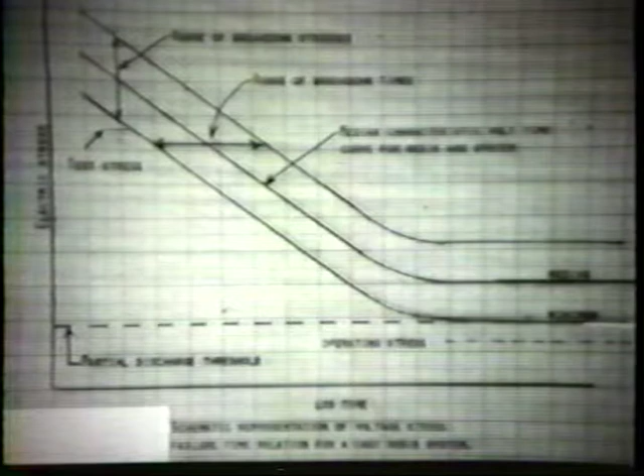This decline is due to partial discharges which can result in delayed failures. This curve shows a band of values representative of the distribution, the variability of the times to failure for a given specimen or type of specimen or a given resin material.

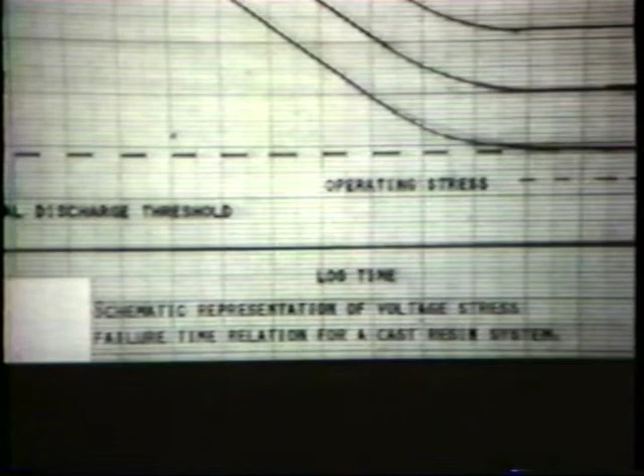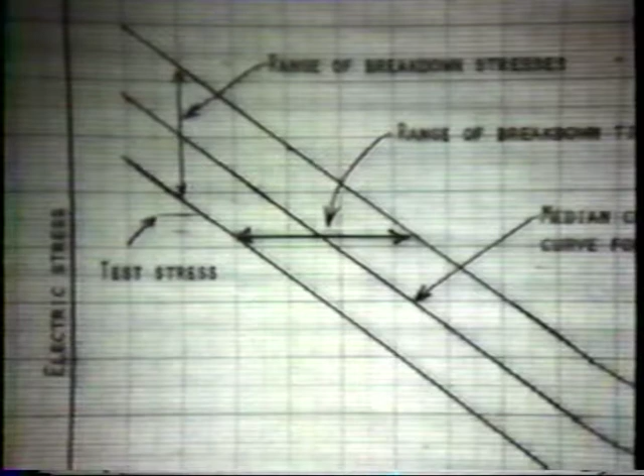This variability occurs in terms of a variation in voltage of breakdown at a given time, or a variation in time to failure at a given voltage stress. You will notice on the curve that the level tends to approach a threshold.

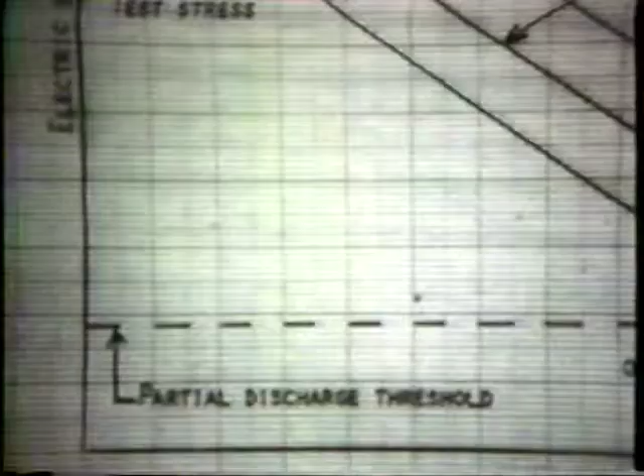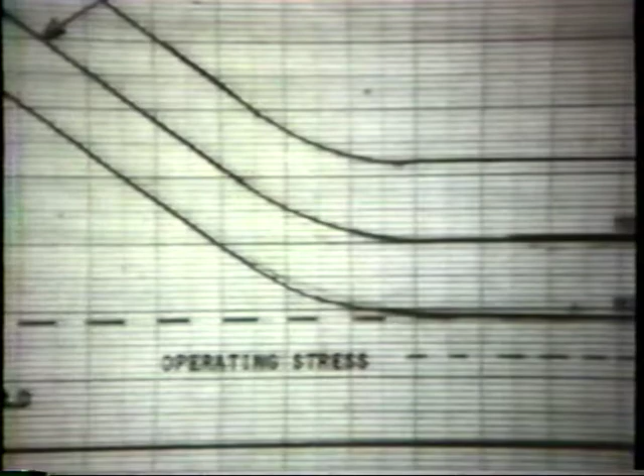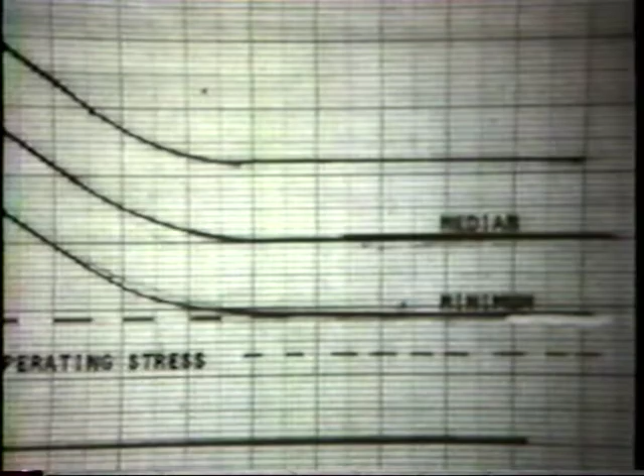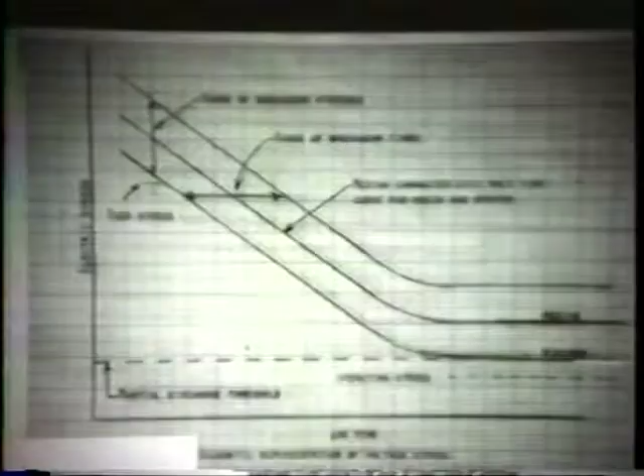This threshold is the threshold for the onset of partial discharges. The dashed horizontal line is drawn to intercept the minimum level at which this may occur, because we believe that in cast systems in particular there is a distribution of sizes of cavities and stress concentrations locally in the resin system. The operating voltage should be set for a long time life below this minimum threshold.

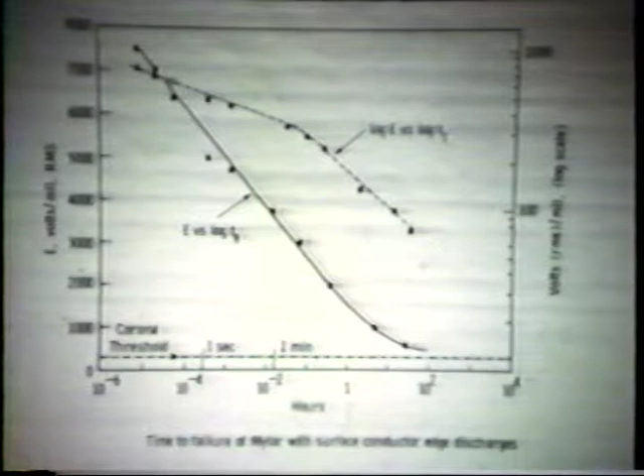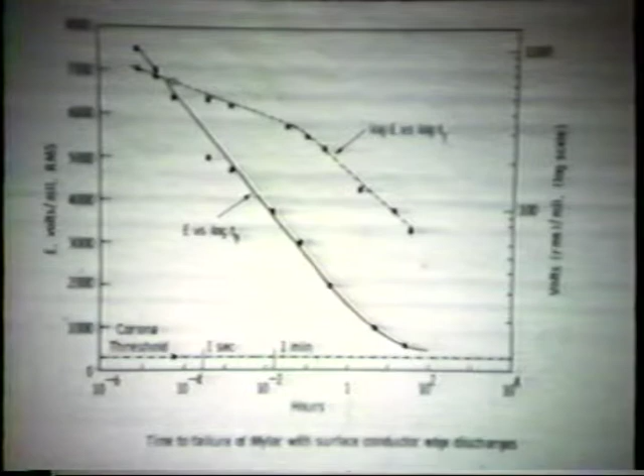If we plot actual data, as we have here, as a function of the voltage stress in volts per mil versus the logarithm of the failure time, we get data like this, which was obtained on a polyethylene terephthalate plastic film. You will notice here that there are two curves.

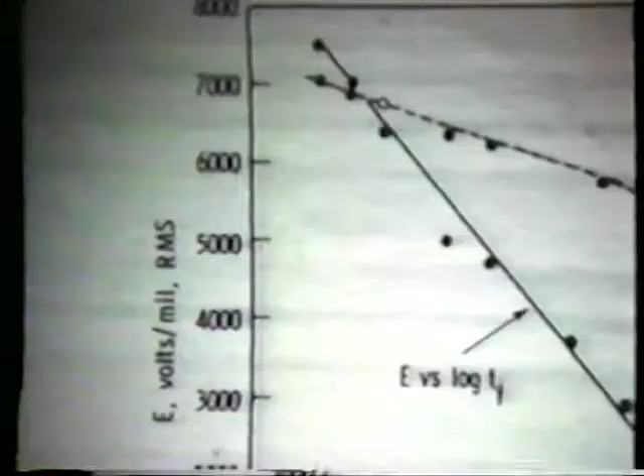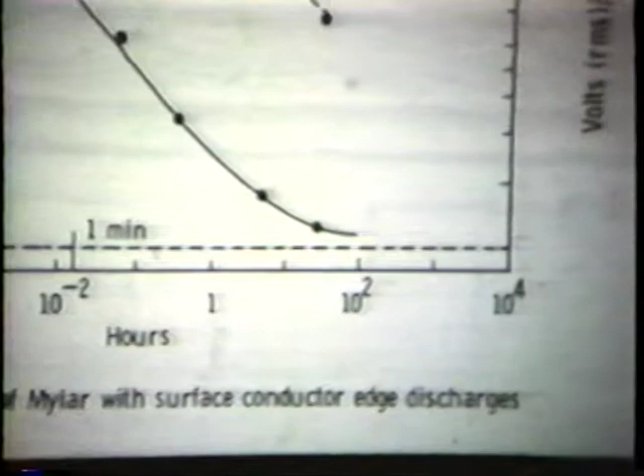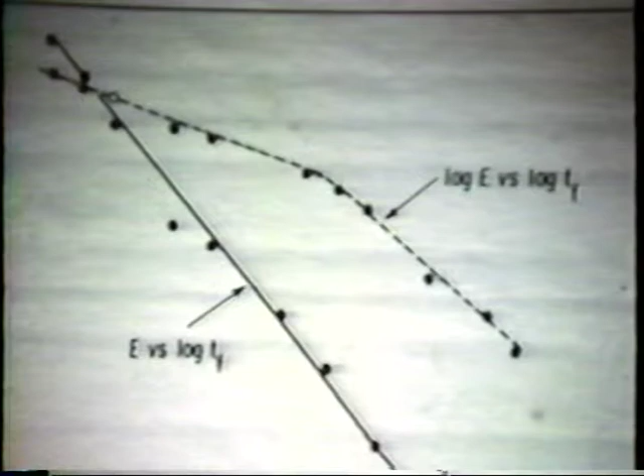One of the curves is plotted as was the schematic curve you just saw, as a function of the stress linearly and the time as a logarithmic function. Another method of plotting such data is shown in the second, upper curve. This curve is plotted as a function of the logarithm of the voltage versus the logarithm of the time. The logarithmic stress or voltage scale is given on the right side of the graph.

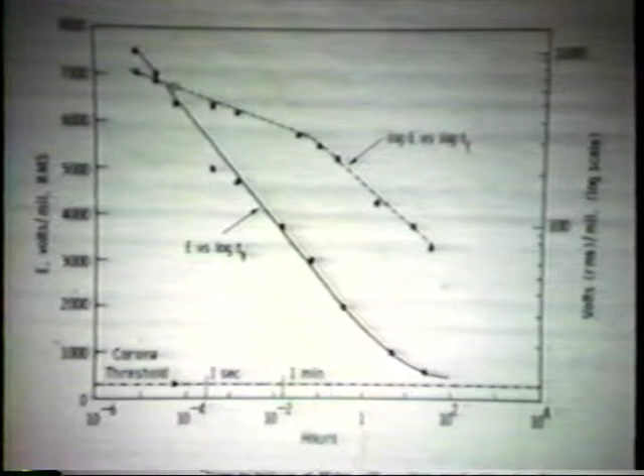This method of plotting has been used more commonly by many investigators, but it has a doubtful theoretical or basic foundation. It does fit, as you see here, the data points over limited ranges of the time and voltage stress.

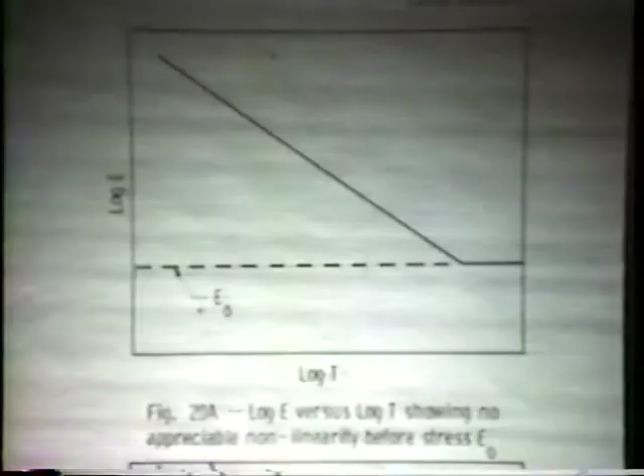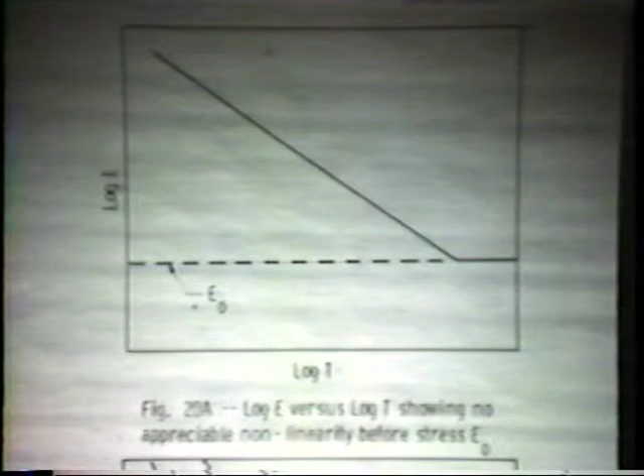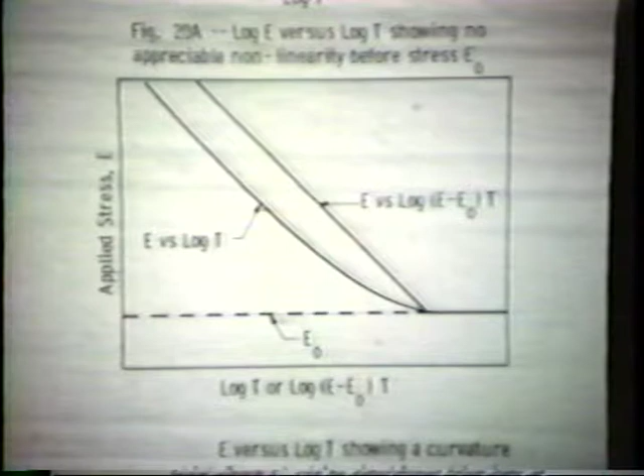We feel that this log-log type of plot, as shown schematically in the upper of the two curves on this slide, is not as good a way of plotting the data as the curve below, where we have plotted first the breakdown time on a log scale as a function of the stress, and then another factor, which is the product of the breakdown time and the difference between the threshold stress E0 and the actual applied stress.

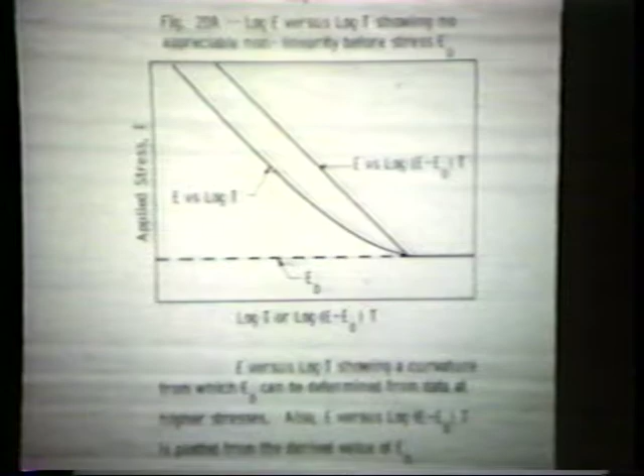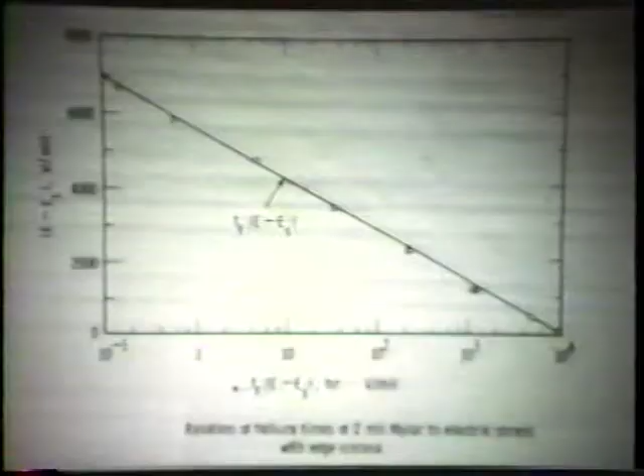When we plot the data in this manner, we find that it is converted to a straight line, as shown in the upper of the two curves on the lower graph. The basis for this method of plotting is illustrated here again on the actual data which was shown in the second slide.

This is based on the fact that the quantity of discharges per unit time is the determining factor in the rate at which it approaches failure. We feel that failure occurs when a sufficient number of discharges have been striking the surface of the resin.

The quantity of discharges is indicated here by the product of a constant which we can say is due to the discharge density, in other words, the number of discharges per unit area, and the frequency. The number of discharges is nearly constant at each cycle, so that if we multiply the number of cycles per unit time, we get the number of discharges per unit time.

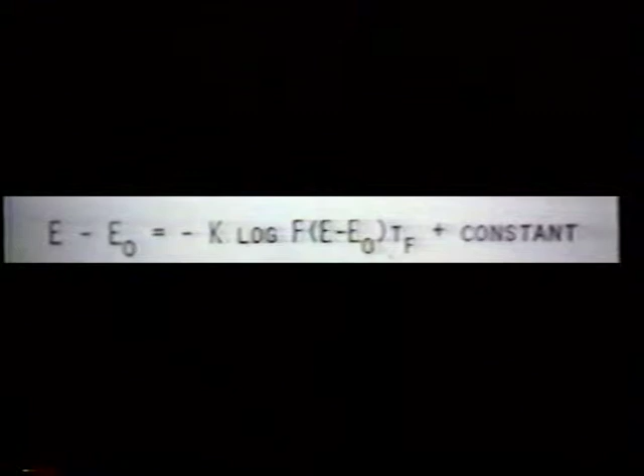And then we have added this other parameter, the applied stress minus E0, which is the threshold stress for discharges.

The derived relation then, using this quantity, is that the breakdown stress minus the threshold stress is equal to a constant times the log of this product of F, the frequency, times the E minus E0 quantity, which is the over voltage above the threshold voltage, and the time, plus another constant, which sets the level of the line.

This line extrapolates to zero at a stress equal to E0. We feel that below this stress, no failures should occur due to the partial discharges.

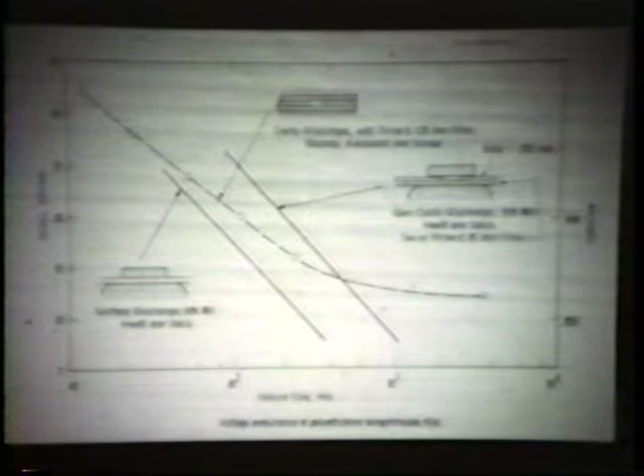Here we are representing some recent data showing the effect of partial discharges measured with cavities placed between two films.

The dashed line is data that was recently published last year from a group of laboratories in Japan. This data was obtained using 3 plastic films with a hole between the center film in which the discharges occurred.

This tends to overlap older data which we had published from the Westinghouse laboratory some years ago, using, instead of the 3 films, a mica sheet which was resistant to the discharges to protect the surface from the edge discharges at the upper electrode.

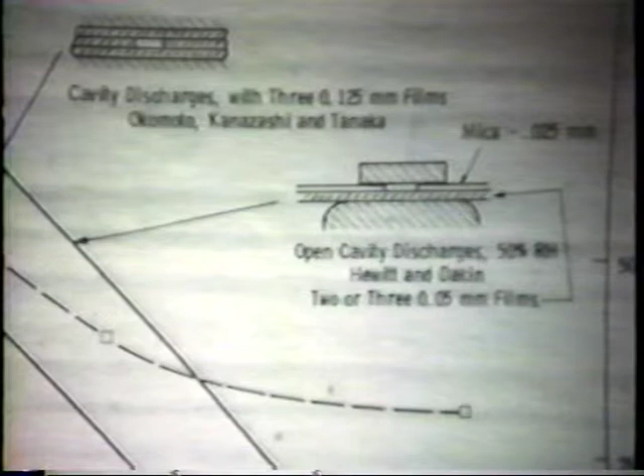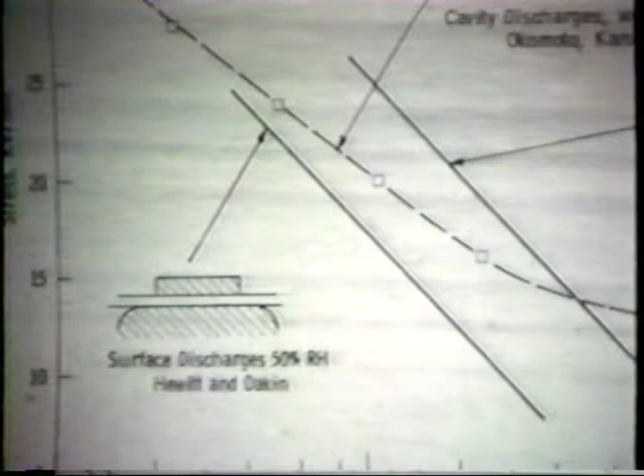You can see that the 2 straight solid lines show that the times to failure are longer when we have internal discharges than with surface discharges, somewhat longer.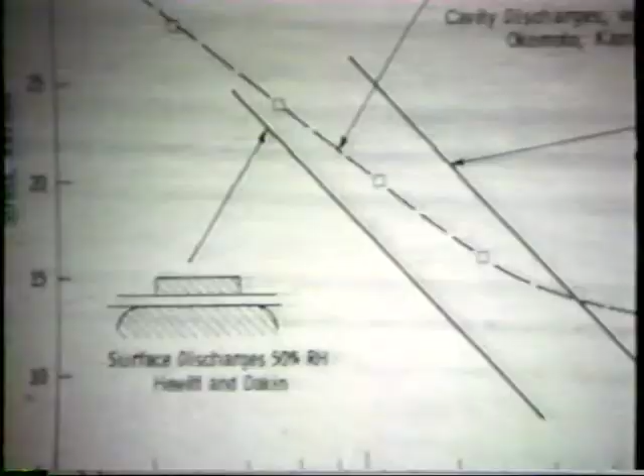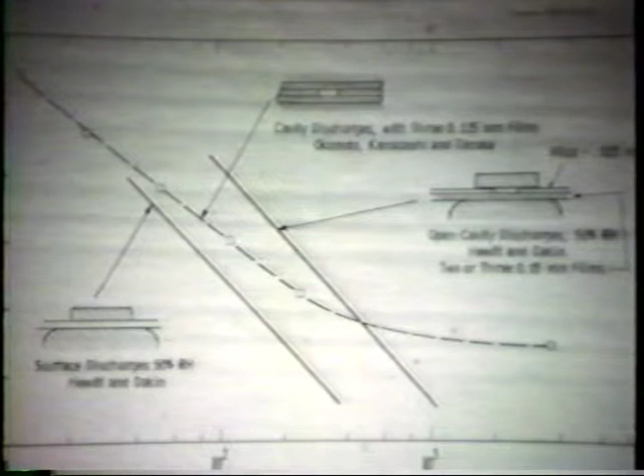There are a number of factors which influence this difference between internal discharges and surface discharges. The internal discharges will start at a higher voltage because the breakdown spacing of a cavity, such as represented here by the sketch in this slide, is smaller than the breakdown spacing that would be prevalent at the edge of the electrode on the surface.

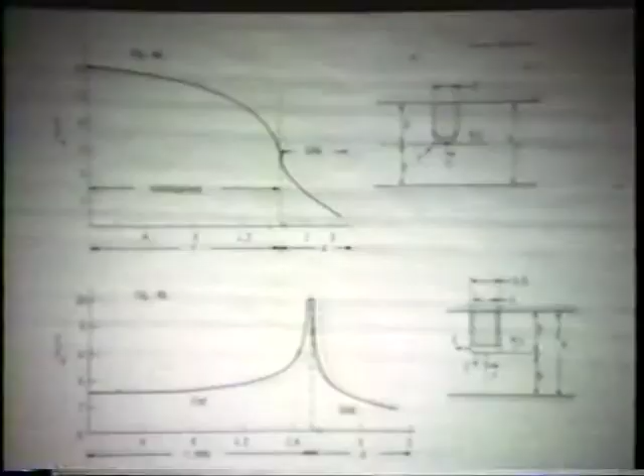Another factor which influences the breakdown time in cavities is the stress concentration. We show here the data obtained on the stress distribution with 2 different shapes of cavities.

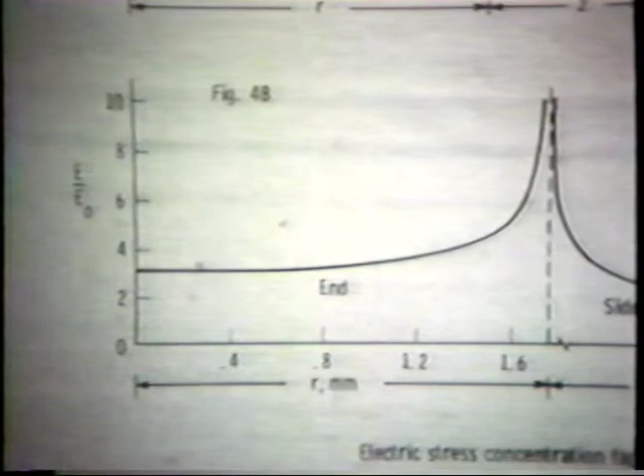The lower curve in this slide shows the electric stress distribution as a function of the distance from the center of the electrode to the edge of the cavity. This stress rises to a high value of the order of 10-fold above the average stress in this type of arrangement.

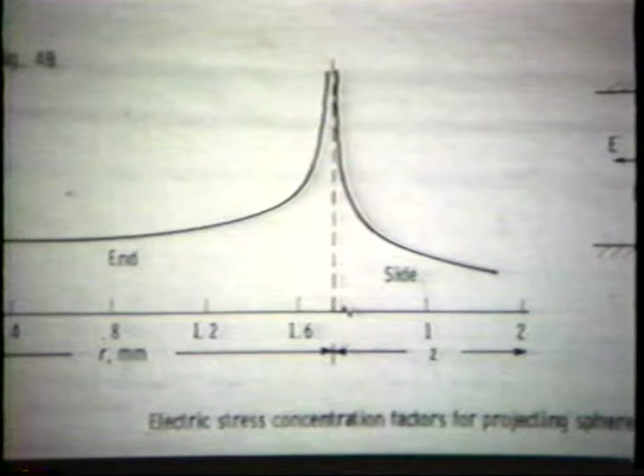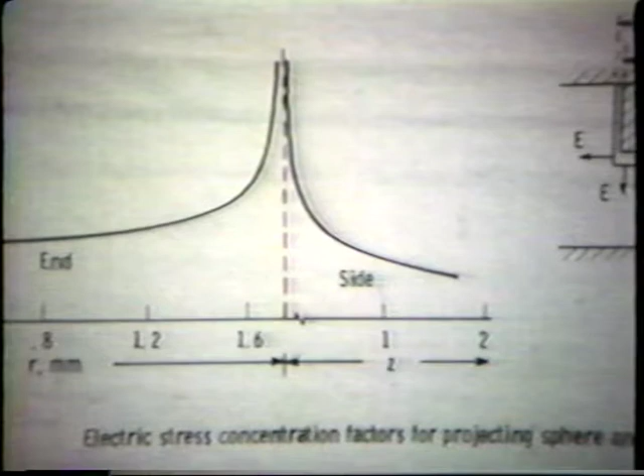In this case, tests were made to failure. The discharges occurred in the space between the metal pin inserted into the cavity and the bottom of the cavity. Because of the stress concentration at the corner edge of the cavity, which is the bottom of a cylindrical space, is very high, and this influences the breakdown to occur at that point.

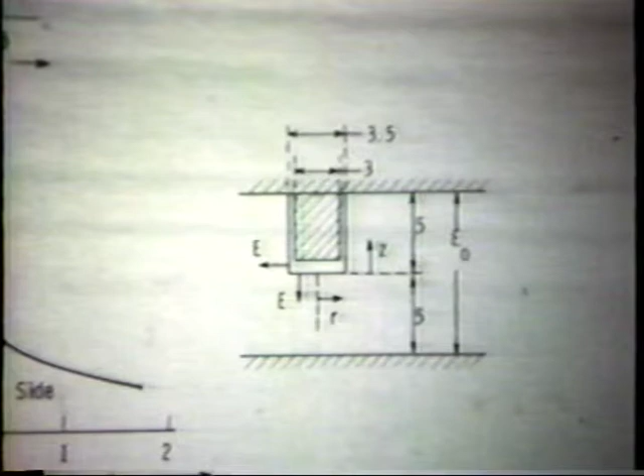A treeing-like breakdown pattern developed, and failure occurred from the edge of this cavity. This has led us to believe that the shape of the cavity is extremely important in the resistance to failure from discharges in such cavities.

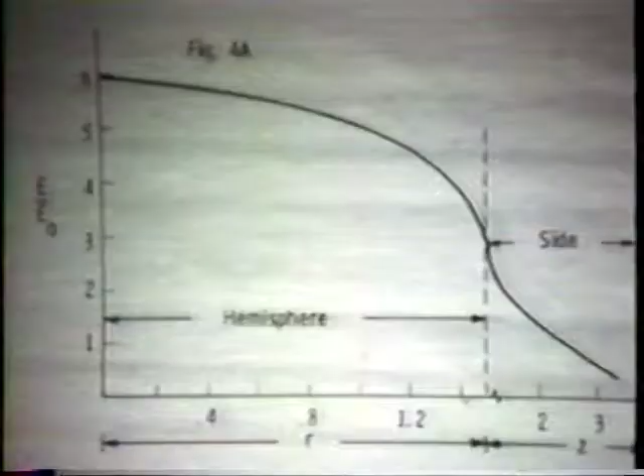The upper figure in this slide shows the stress distribution of a cavity formed by a hemispherically ended cylindrical hole into which a pin was also placed to form the upper electrode.

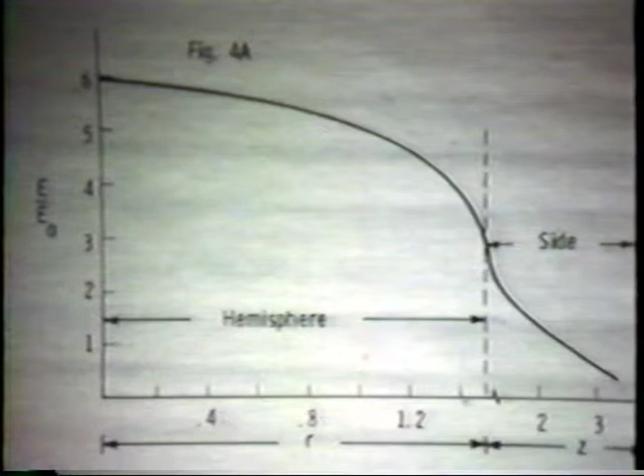You can see that the maximum stress, which here occurs at this center bottom of the cavity, is less than it is in the lower case. It's 6 versus 10 in the lower case.

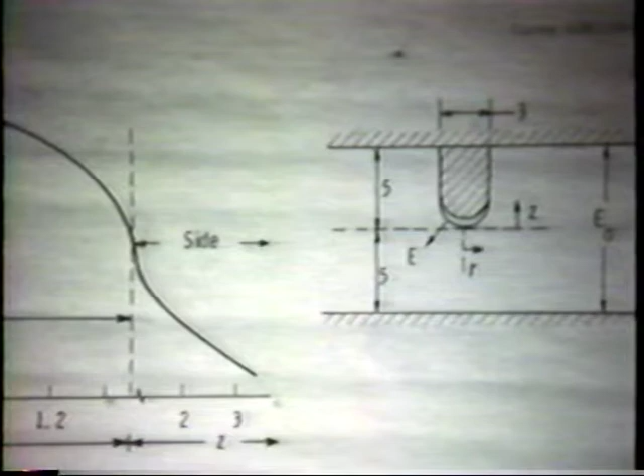This produced a longer failure time than in the lower case, as shown in the next slide. You will notice a stress of the order of 8 kilovolts per millimeter.

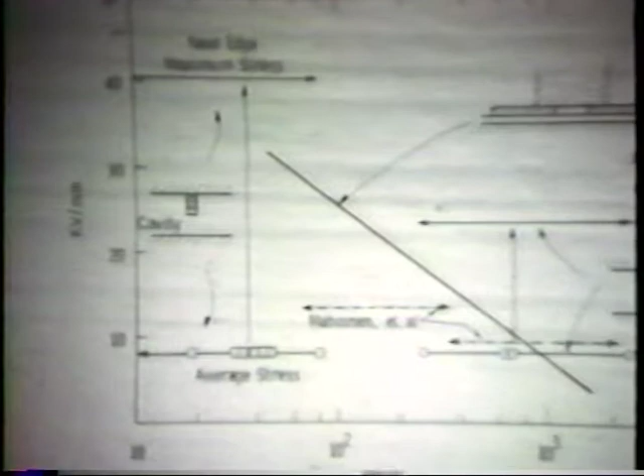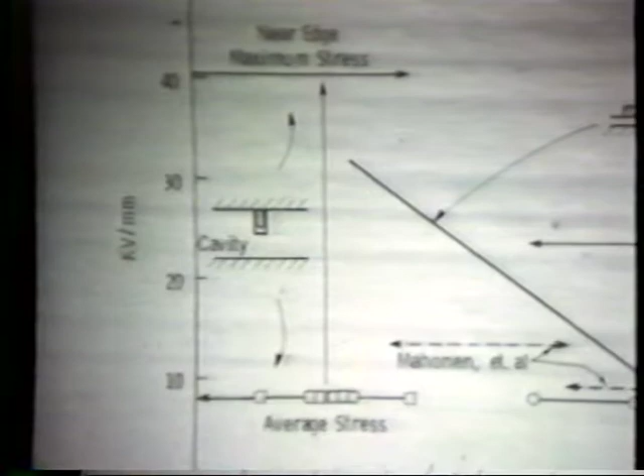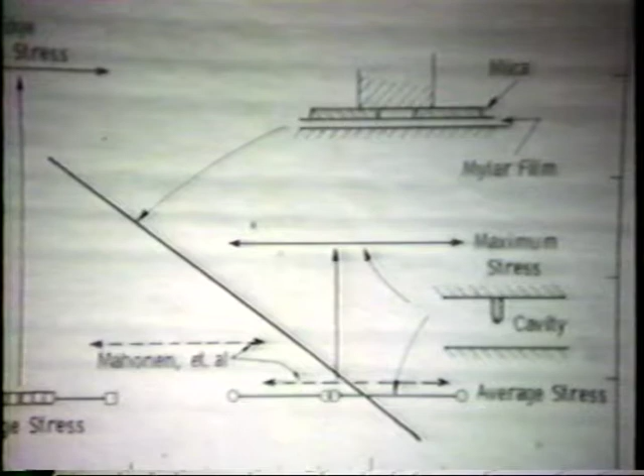At the left, we have the breakdown data obtained for a cylindrical cavity with a square edge bottom, as shown in the previous slide. To the right, we show a band of data at the 8 kV per millimeter stress, which represents the failure times at the bottom of the cylindrical cavity having the hemispherical end, which had the lower stress.

You will notice in particular that the failure time with the sharp-edged cavity is much shorter even than with the cavity formed by a hole through a sheet of mica, which is represented by the straight slanting line. This is the same data that was presented in a previous slide.

This very short failure time was one of the reasons why we suspected that the stress in the resin at the bottom of the cavity was a very important factor in the failure under these conditions.

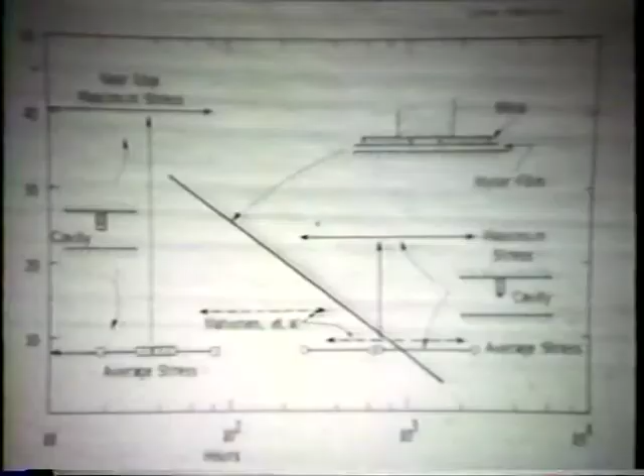The data for these two different cavities, the cylindrical sharp-edged cavity and the hemispherically ended cavity, were both increased by the factor of the stress concentration. The 8 kV per millimeter value was the average stress, the spacing from the bottom of the cavity in each case to the lower electrode.

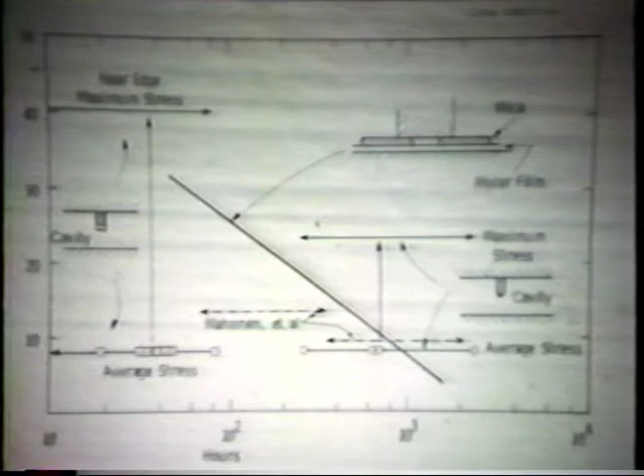When we multiply the average stress by the stress concentration factor as obtained by the stress distribution plot from the previous slide, we find that the values come up and tend to form a band of data which is more comparable and somewhat above the values obtained with the cavity through the mica, the hole in the mica.

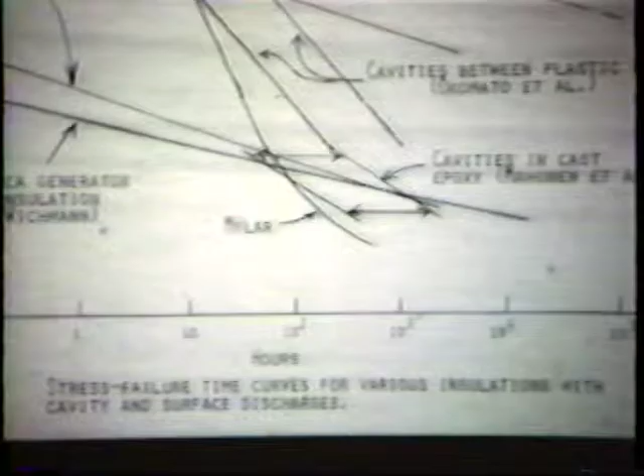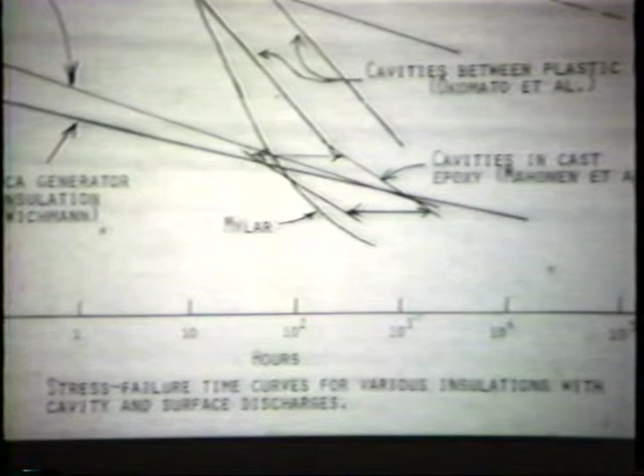We feel that we have now shown that the breakdown times with internal discharges in cavities is a function of the stress concentration in the resin, and also a function of the log of the breakdown time, which on a log scale is a linear function of the stress.

We are showing on this curve comparative data on a variety of different systems. The line for the polyethylene terephthalate, the mylar, is reproduced here, together with data recently published on cavities in films published in Japan, and the data for a new set of tests which were started several years ago and are still continuing on cast epoxy resins.

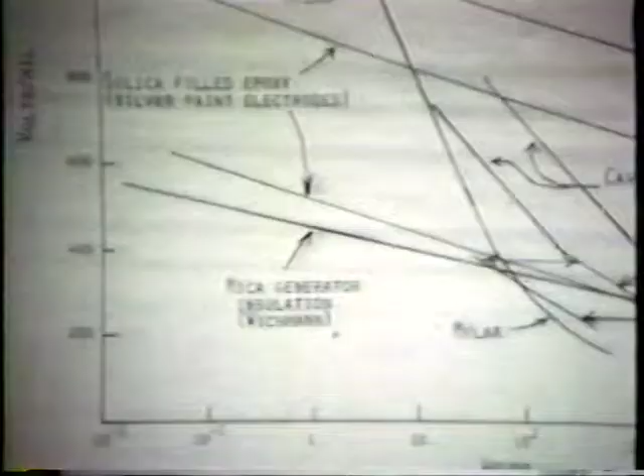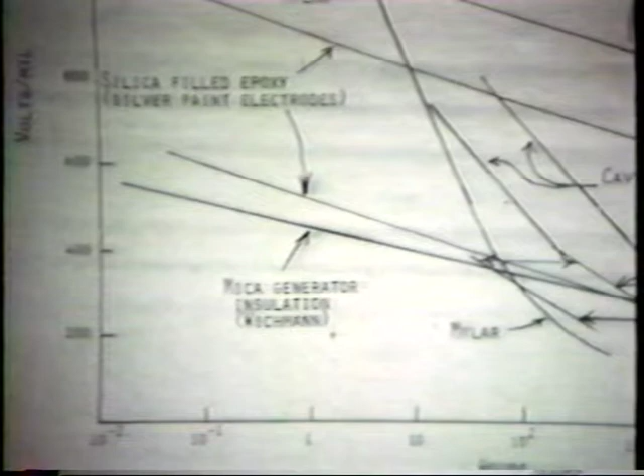These tests began with a silver paint electrode, using a specimen which had a deep recess in it. We found unexpectedly that the silver paint electrode was not a sufficiently good contact to the resin, that in applying the paint, cavities, tiny micro cavities, were produced under the paint.

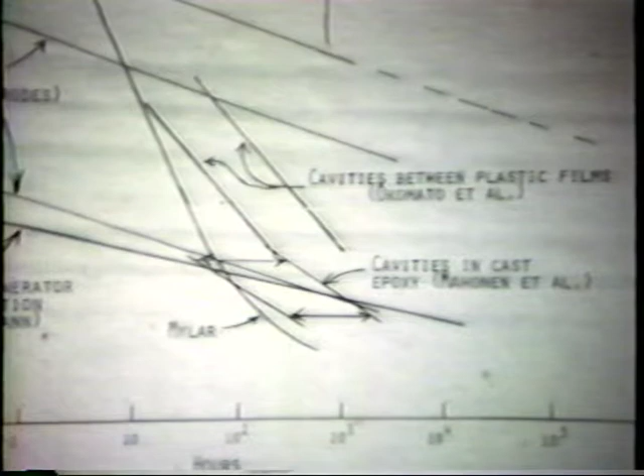This caused a delayed failure, even though in this case we could not usually measure any discharges above 0.01 picocoulombs, a very low level, the detection threshold limit for our most sensitive pulse detection equipment.

We have previously shown that when the area of a small cavity is sufficiently small, the discharge magnitude, which is proportional to this area, will correspondingly be small. Therefore, very small microcavities can occur which are undetectable by present pulse detection techniques.

Nevertheless, in spite of the fact that no discharges could be measured in such specimens, delayed failures did occur, showing a trend with time, much as is seen in other cases where we knew that discharges were occurring, either on the surface or in artificial cavities.

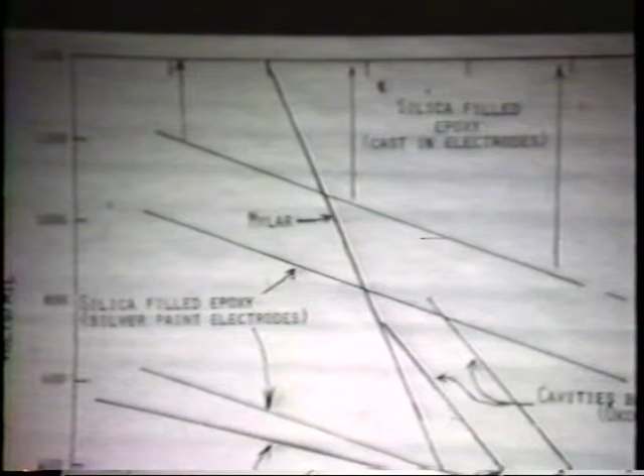When castings were made in such a way that electrodes were cast into a resin under vacuum, and with electrodes prepared so as to obtain maximum adhesion of the resin to the electrodes, the level of the breakdown stress at a given time shifted upward by a factor of more than two. This is represented by the upper line in this figure, and the band of values extend above the stress level shown on this curve.

Nevertheless, even in this type of specimen, where we have done everything we know best to do to avoid discharges, we still get delayed failures, possibly due to separation of the resin at some very small areas on the surface of the electrode.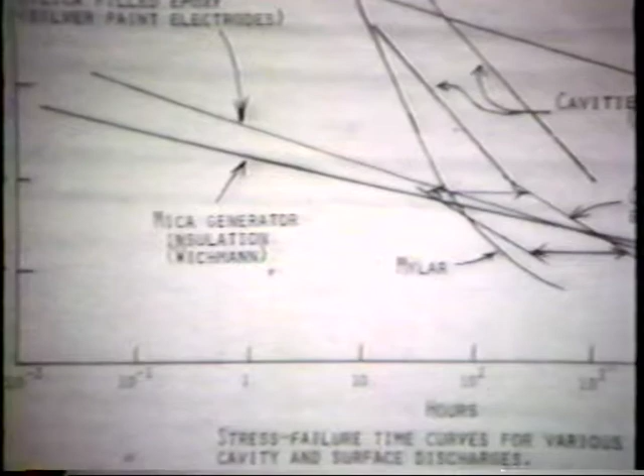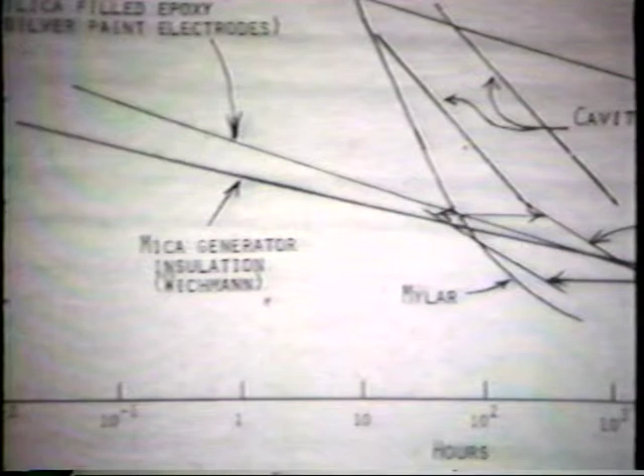We have plotted here on the same graph, for comparison, the volt time curve for mica generator insulation, which is the lowest curve on the line. It has the least slope. We believe that the slope of these lines is a function of the resistance of the material to the discharges, and that the level of the data, the lines, is dependent upon the stress concentration and defects that occur in the specimens.

This conclusion is consistent with most of the data of this type that we have obtained so far.

For example, the cast epoxy, which here has a silica filler, is more resistant than a clear resin to discharges. But because the filler increases the stress in the resin somewhat, the breakdown voltage at short times is lower, and the level of the curve is down.

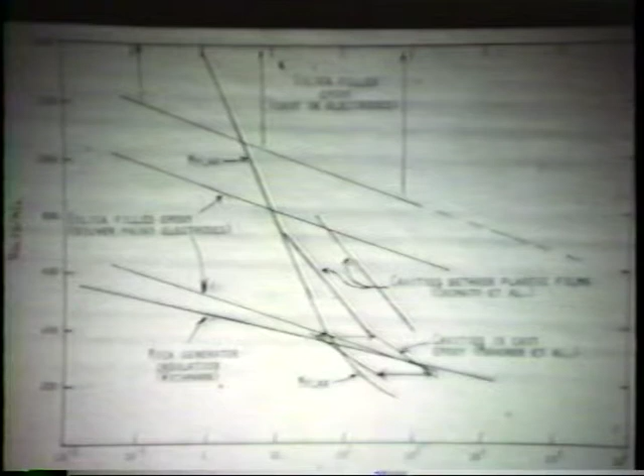It was noticed here that the specimens of cast epoxy, where the electrodes were cast in under vacuum, have a higher level but pretty nearly the same slope of the volt time curve as do the specimens with the silver paint electrodes, where we believe cavities occurred underneath the paint.

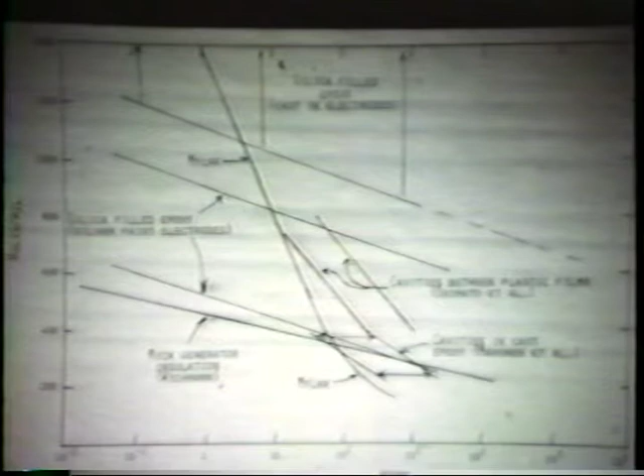In conclusion, I would like to point out that in most of the cases where we have measured discharges, we get similar results to where we have large cavities with measured discharges. But when we make these cavities very small so as to raise the threshold voltage, this produces longer failure times and better long-time voltage endurance.

We do not believe that there is a great deal of difference between the failure times with and without the cavities, unless the discharges are not continuous, as sometimes has been observed in internal sealed cavities.

We have shown here in this data that the stress concentration at the cavities, in the resin next to the cavities, is a most important factor in determining the failure time, because it is the actual stress where the discharges are occurring that influences the level of voltage for failure at a particular time.